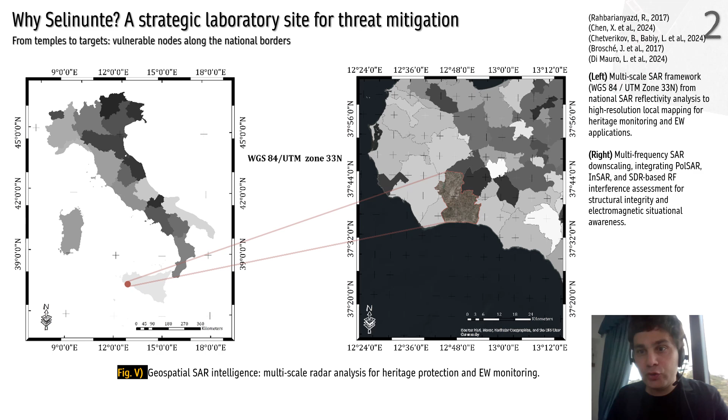So why Selinunte? The site is located along the national borders of Italy and stands as a strategic laboratory site for threat mitigation. The study specifically characterizes dielectric properties in high-resolution synthetic aperture radar (SAR) imaging, which is essential, by understanding how various surfaces reflect, absorb, or scatter radar signals. Highly conductive materials such as metals exhibit strong reflections, making them easily detectable in SAR imagery, reducing the likelihood of conflict and promoting regional stability.

As for Italy, for example, the F-35 Lightning stands as one of the cornerstones of modern defense strategies, delivering unparalleled deterrent technological advantages. As a multi-role stealth aircraft, its ability to integrate advanced sensor fusion, network-centric capabilities, and precision strike ones ensures superior situational awareness.

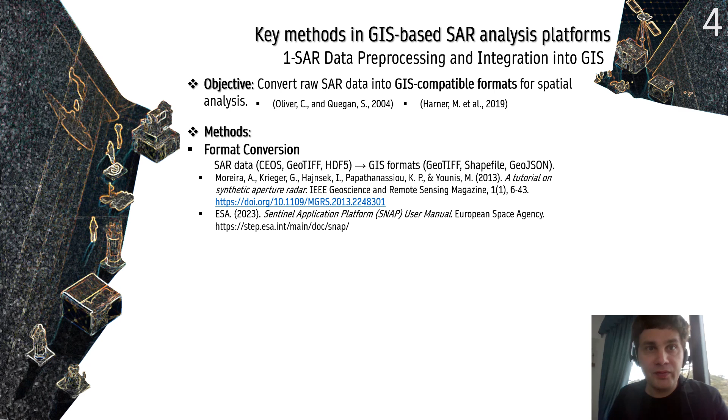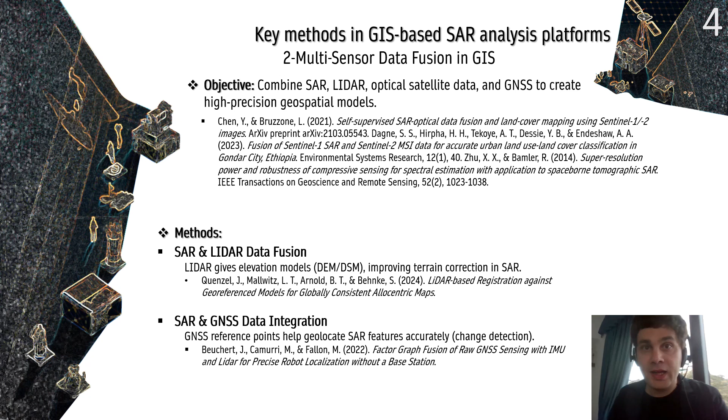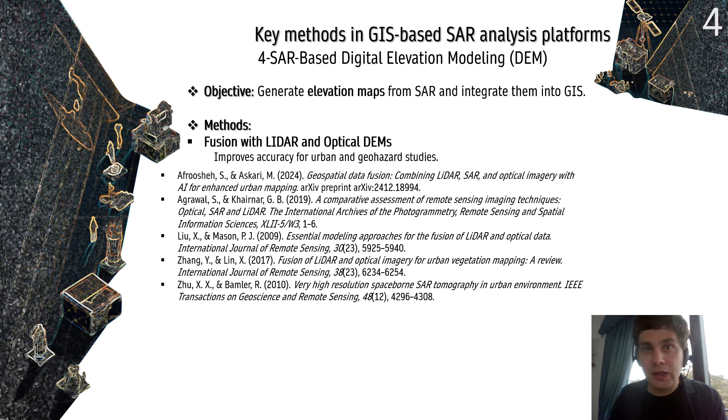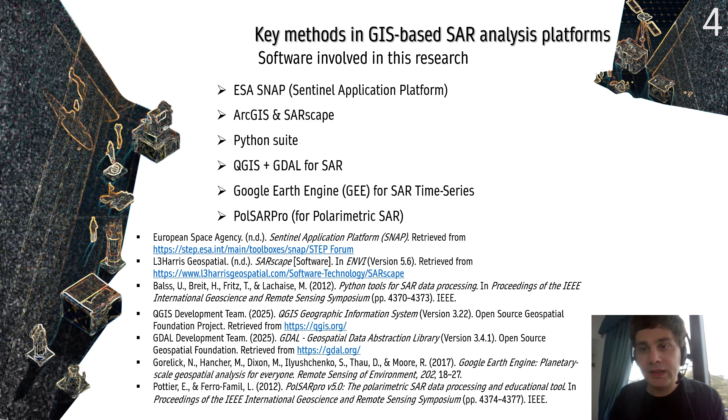As for the core methods, we observe the conversion of raw SAR data into GIS-compatible formats, focusing on calibration, speckle noise reduction, and georeferencing. As for format conversion: SAR and optical image fusion, SAR and LiDAR data fusion and GNSS integration, polarimetric and others, interferometry, stereo SAR, fusion with LiDAR and optical digital elevation models, coherence and amplitude change detection, persistent scatterer interferometry in structural changes, multitemporal SAR analysis, and here indeed the software involved.

So these are the system-level methodologies based on state space representation with a focus on VxWorks for real-time mission-critical avionics applications, estimating radar cross-section (RCS), and integrating signal processing theory with jamming dynamics and ERP considerations by combining scattering models and power equations. State space equations model radar propagation, reflection, and RCS under complex EM conditions.

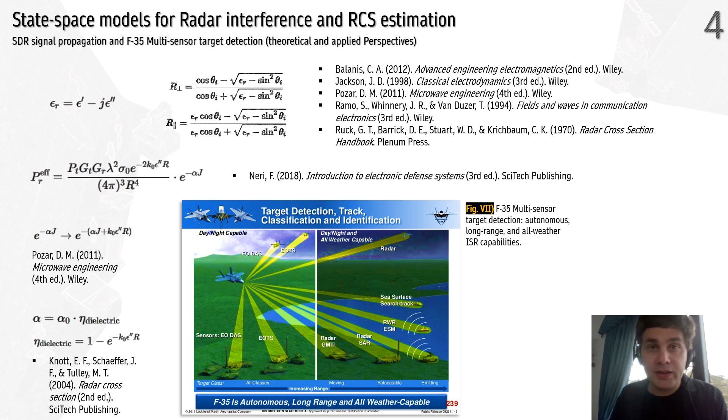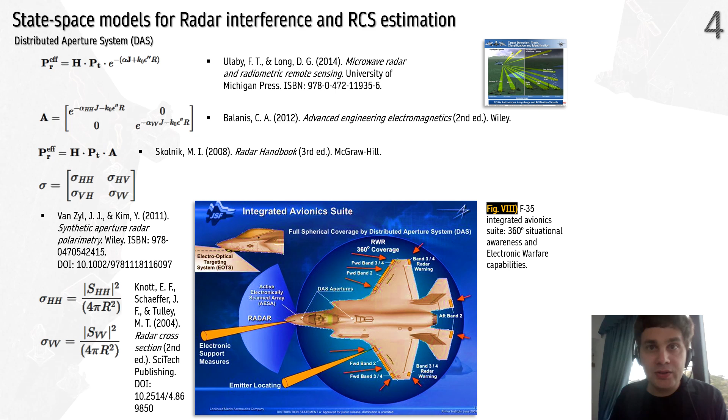As for F-35 multi-sensor systems, it exploits these dynamics for autonomous long-range target detection of dielectric reflections and ISR optimization. Matrix formulation captures polarization effects and propagation losses, scattering coefficients sigma HH, sigma VV. For the F-35, the DAS enables 360-degree threat detection.

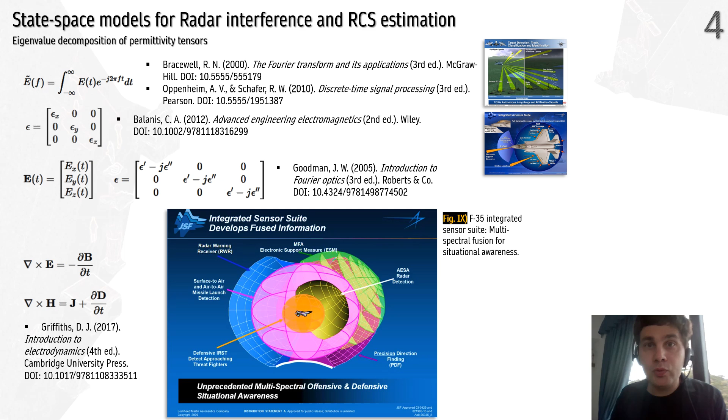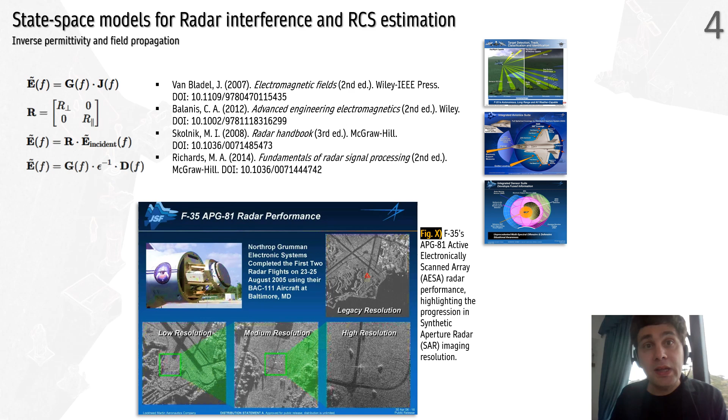Eigenvalue decomposition of the permittivity tensor epsilon models anisotropic media response in radar propagation, coupled with Maxwell's equations and Fourier-based analysis. This supports multispectral sensor fusion for dynamic situational awareness. Inverse permittivity epsilon minus 1 and Green's function G govern the propagation of electric fields in complex media. The F-35 APG-81 AESA radar exploits this modeling to enhance SAR resolution, enabling precise imaging across operational contexts.

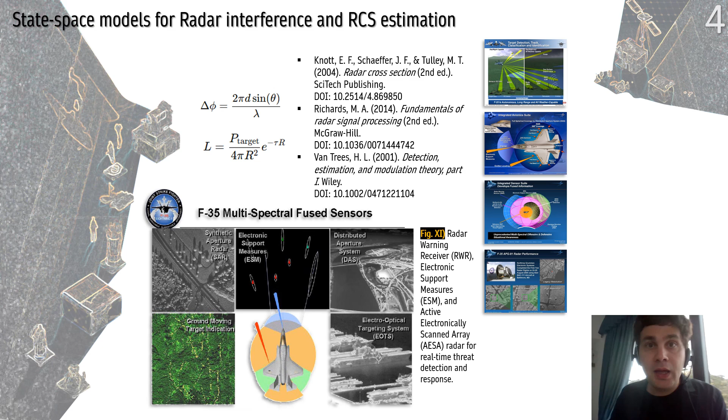Phase shift and power loss L model spatial resolution and signal attenuation. As for this fusion, SAR, ESM, DAS, and EOTS enable real-time threat detection. So key research constraints include reliance on SAR data, high computational demands, and poor cross-site generalizability. There is also a lack of long-term evaluation, limited AI integration, and insufficient standardization across collaborative frameworks.

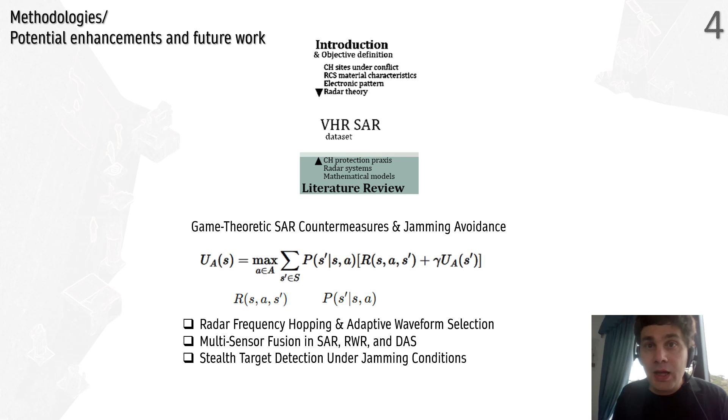Future directions include fusing SAR with EO, LiDAR, and GNSS, advancing multiscale RCS analysis, and refining noise reduction. Game theoretic models and reinforcement learning enable SAR systems to dynamically avoid jamming by optimizing action policies, U_A(s). Reinforcement-based game theory also sees SAR, RWR, DAS, and stealth target detection in contested environments.

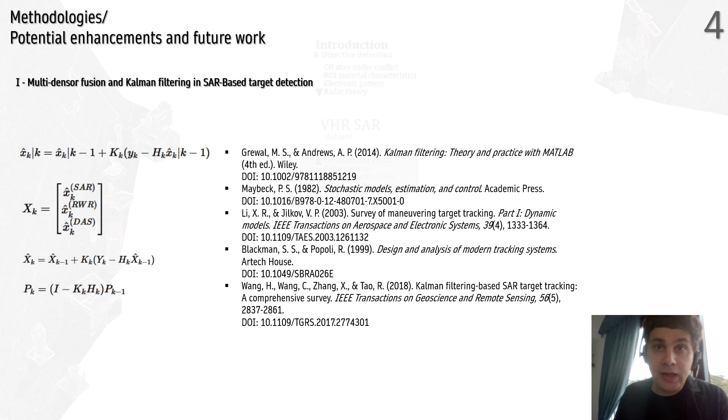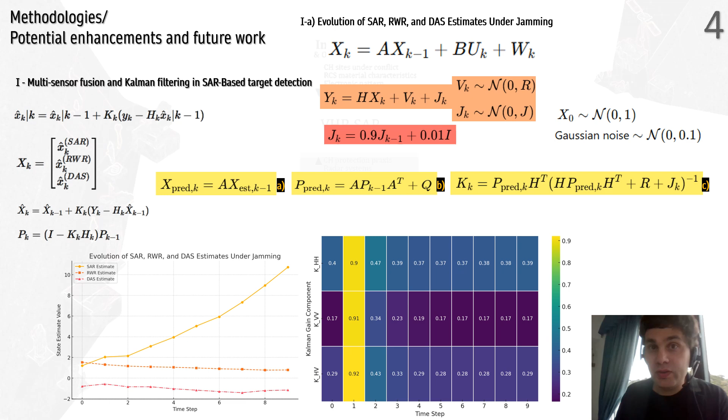Kalman filtering enables real-time fusion of SAR, RWR, and DAS data for enhanced target tracking. State updates minimize error covariance, improving detection under dynamic conditions. Kalman filtering tracks SAR, RWR, and DAS estimates under jamming by predicting state evolution and adjusting with noisy jammed observations. The gain matrices adapt over time, minimizing estimation error despite interference J(k).

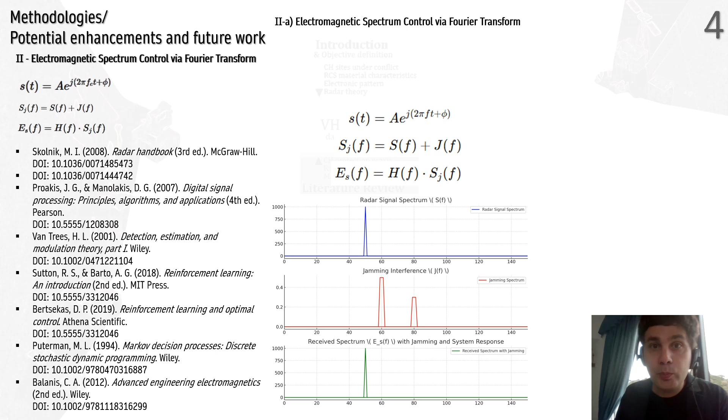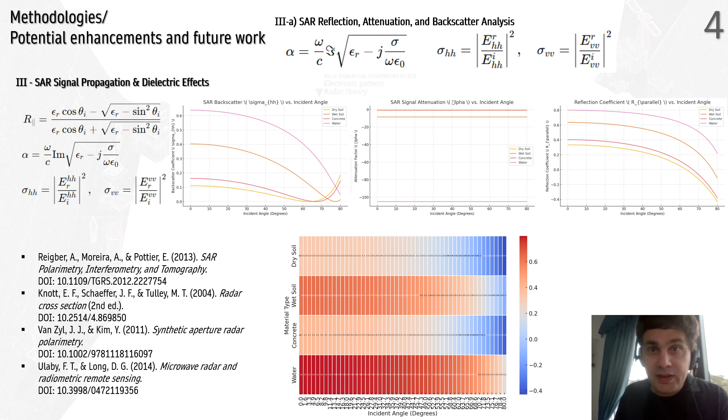Fourier-based spectral control models radar signals as s(t), enabling isolation of jamming in the frequency domain. System response H(f) filters interference, supporting resilient signal reconstruction. SAR signal behavior is modeled through reflection R parallel, attenuation alpha, and backscatter sigma, accounting for dielectric properties. Plots show how incident angle and material type, for example soil, water, concrete, affect energy loss and radar return intensity.

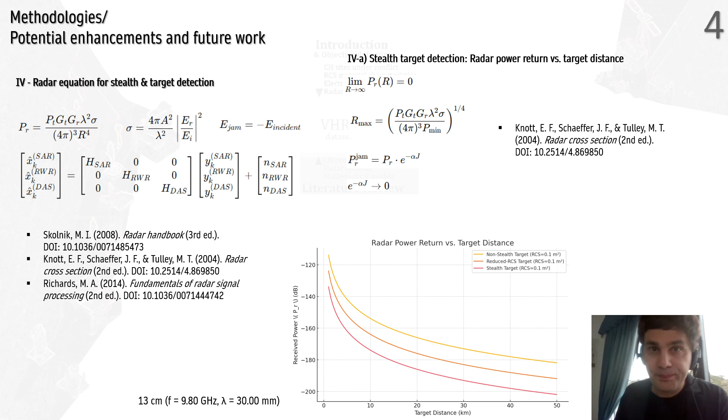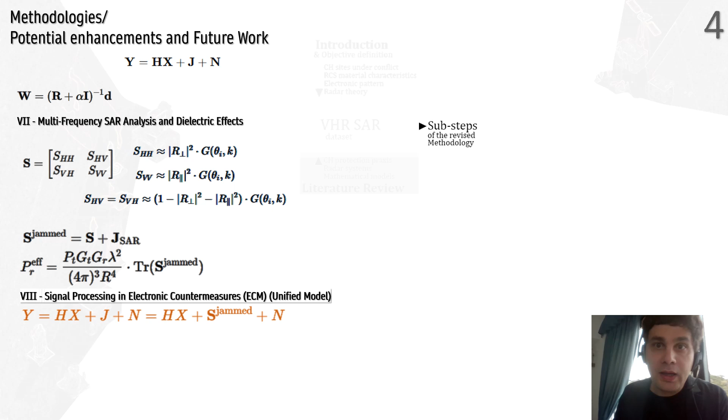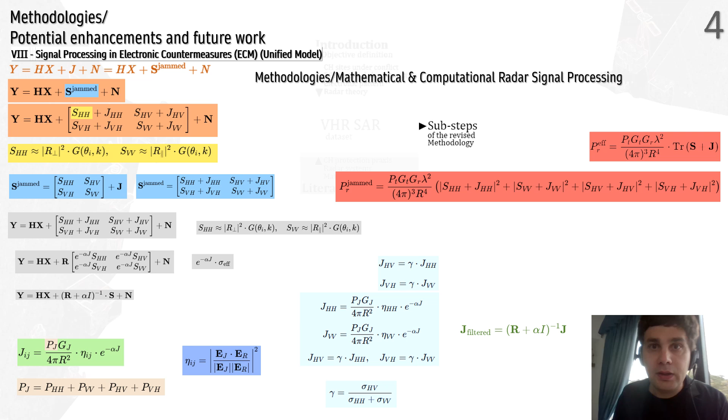The radar return equation Pr shows rapid power decay with distance and lower RCS. Stealth targets reduce sigma, shifting curves downward and limiting detection range, as visualized in the power-distance plot. Multifrequency SAR modeling incorporates dielectric effects via reflection coefficient R parallel, gain, and polarizations. As for figure 6, multifrequency SAR is also encoded in matrix S with dielectric gain G with a unified ECM model epsilon. It formalizes signal degradation under jamming for countermeasure design. Effective power return Pr jammed reflects both signal and jamming contributions across polarizations, filtered adaptively via J filtered.

Here we outline the core steps of the methodology. First, feature extraction is performed using ORB key points integrated with Kalman models for stable tracking under motion. Next, we conduct data collection of permittivity values, epsilon 1, 2, with Gabor filters and GLCM across HH bands. This methodological section presents the mathematical basis behind SAR detection under the noisy conditions we have approached.

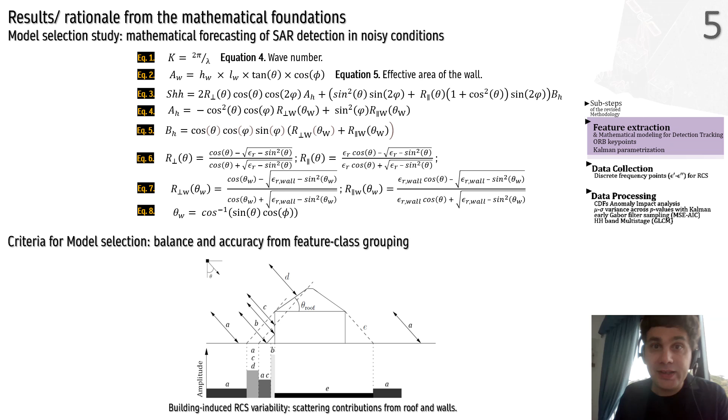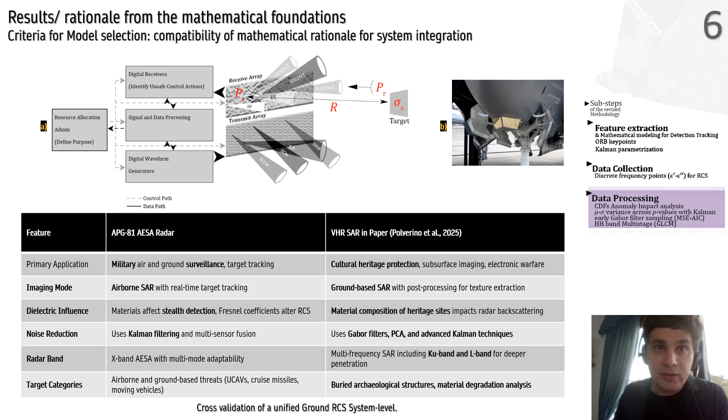We model wall and roof scattering of the built environment using permittivity-based reflection terms and wave geometry. The equations define how incident angles, building shape, and dielectric properties influence the backscattered signal. Model selection prioritizes accuracy and balance. In parallel to this, the device shown under the F-35 is part of the electro-optical targeting system, EOTS. It enables real-time ground target locking, tracking, and definition in parallel with our methodological framework.